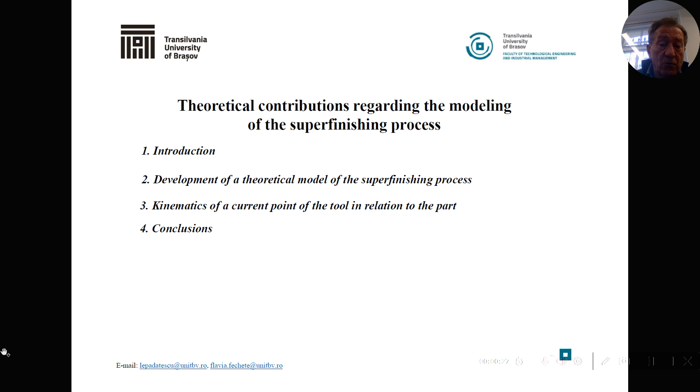As an introduction, the study of kinematics of a point of the abrasive tool on the surface of the part arose from the need to know the shape and length of the trajectory of a grain during rotation of the part. This is necessary to determine the parameters of the chipping regime, the length of the curve generated by the particle of the abrasive tool on the surface of the part, to observe which elements intervene in the equation of the trajectory of the movement of an abrasive grain, and to intervene on them to optimize the chipping regime.

Also, based on the relations obtained to determine the space traveled by the abrasive grain, the respective velocity and acceleration can be determined by differentiating with respect to time, and it can be observed during the entire processing that these parameters have variable values over a period. This fact leads to a variation of the parameters of the cutting regime and explains the fact that the roughness obtained after processing is not constant over the entire surface of the piece.

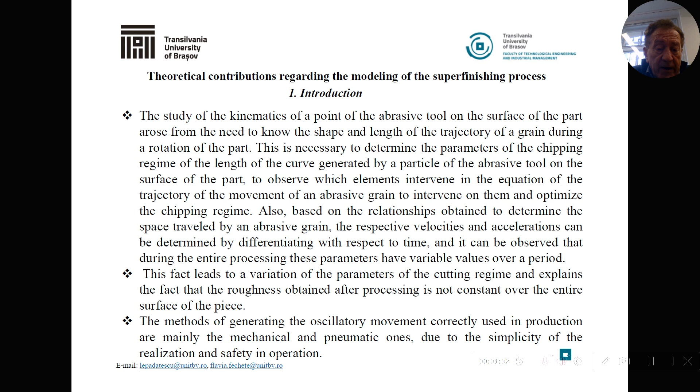The methods of generating the oscillatory movement currently used in production are mainly mechanical and pneumatic, due to the simplicity of realization and operation.

Development of the theoretical model of the superfinishing process. The theoretical model explains the phenomenon of automatic interruption of the chipping process during superfinishing through the prism of the intervention of the chipping liquid characterized by viscosity.

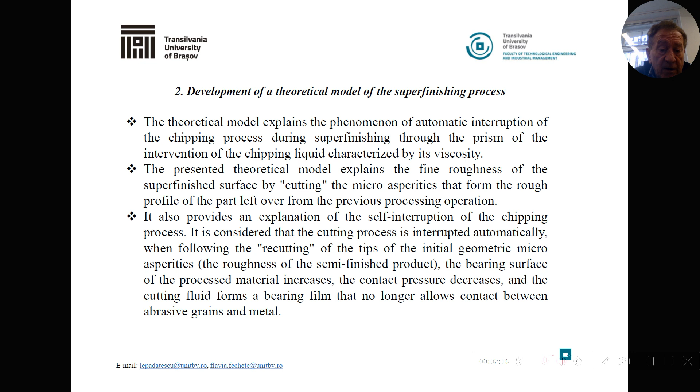The presented theoretical model explains the fine roughness of the superfinished surface by cutting the micro asperities that form the rough profile of the part left over by the previous processing operation. It also provides an explanation of the self-interruption of the chipping process. It is considered that the cutting process is interrupted automatically following the removal of the tips of the initial geometric micro asperities.

The proposed theoretical model starts from the following specifications. The active part of the abrasive grain, not embedded in the binder, has a dimension comparable to the maximum height of the micro asperities, about 4 microns, that form the profile of the processed part. The chipping liquid present in the processing area can be assimilated with a continuous environment of spherical particles that try to form an adsorption layer on the surface of solid bodies, but due to dimensions close to those of the micro-relief of the part, they fail to penetrate into the micro-asperity profile.

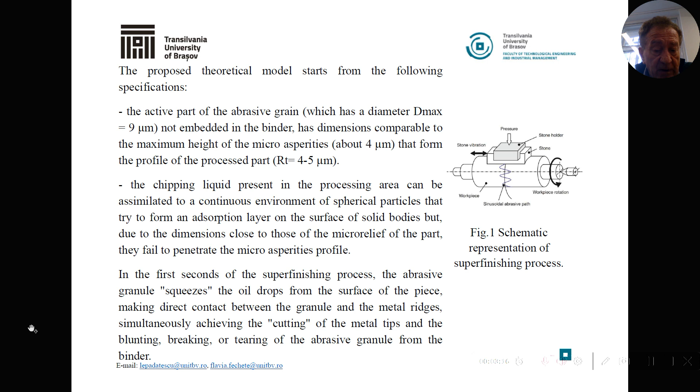In the first second of the superfinishing process, the abrasive granule squeezes the oil drops from the surface of the piece, making contact between the granule and the metal ridges, simultaneously achieving the cutting of the metal tips and the blunting, breaking, or tearing of the abrasive granule from the binder.

Part of the metal tips can be fragmented and pulled from the machining area by the cutting liquid, and others remain and penetrate into the depth of the valley. The alternating movement of the tool favors the stuffing of the chips pulled into the micro-relief of the part. In the next 10 seconds of machining, the abrasive removes the entire layer of material that constitutes the initial micro-relief and begins to dig into the compact material.

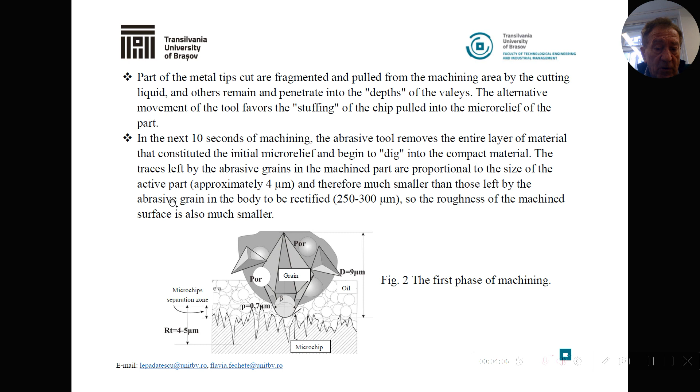The traces left by the abrasive grains in the machined part are proportional to the size of the active part, and therefore much smaller than those left by the abrasive grain in the body of the grinding wheel. So the roughness of the machined surface is much smaller. You can see this in the first phase of the machining. The peaks of the superfinished surface are much more frequent and finer, so the bearing surface is larger and the pressure lower. The oil particles no longer pierced, and the superfinishing process is much more difficult.

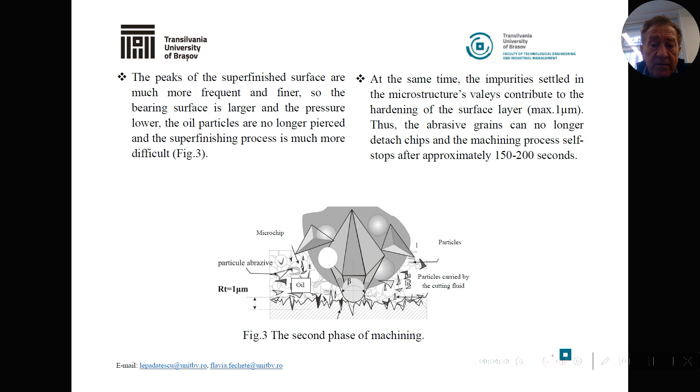At the same time, the impurities settled in the microstructure valleys contribute to the hardening of the surface layer. Thus, the abrasive grain can no longer detach chips, and the machining process stops after approximately 200 seconds.

Kinematics of the current point of the tool in relation to the part. The first is superfinishing with plunge feed. During the processing of the part by superfinishing, the abrasive grain describes trajectories of different shape and length on the surface of the part. The length of this trajectory is considered to represent the degree of coverage of the surface with traces of the processing.

There is a direct link between the degree of coverage and the quality of the surface of the piece, in the sense that with the increase of the degree of coverage, the roughness of the surface, the bearing coefficient, and the state of the surface layer improve. An abrasive particle has a periodic sinusoidal movement during processing, whose equation you can see here, where omega is the angular velocity of the part.

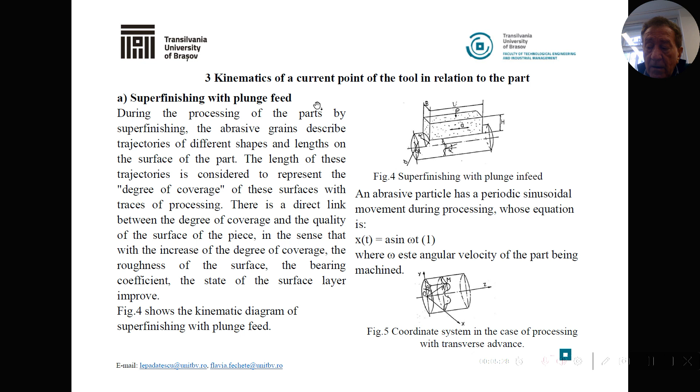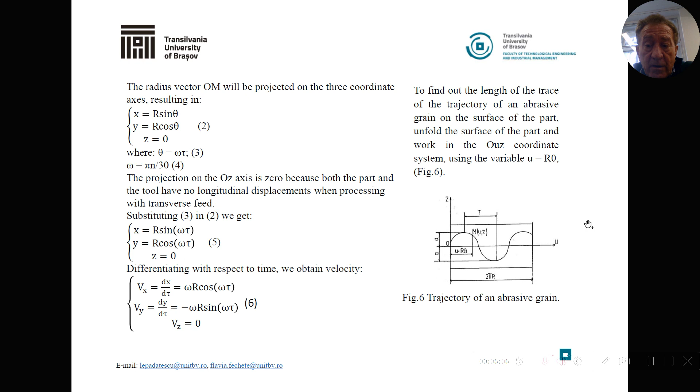To find out the length of the trace of the trajectory of the abrasive grain on the surface of the part, unfold the surface of the part and work in the Ouz coordinate system, using the variable u = Rθ. Processing the relation and considering that only the length of the trajectory of the abrasive grain at one rotation of the part will be taken into account, the limits of the parameter will be 0 and 2π, resulting in formula 14.

From relation 14, it can be seen which factors lead to an increase in the length of the trajectory of the abrasive grain on the surface of the part, because the quality obtained after processing is directly proportional to its length. The amplitude of the oscillatory movement also has an important influence, because as the amplitude increases, so does the quality of the processed surface. The amplitude cannot be too high because it is limited by technological and functional considerations.

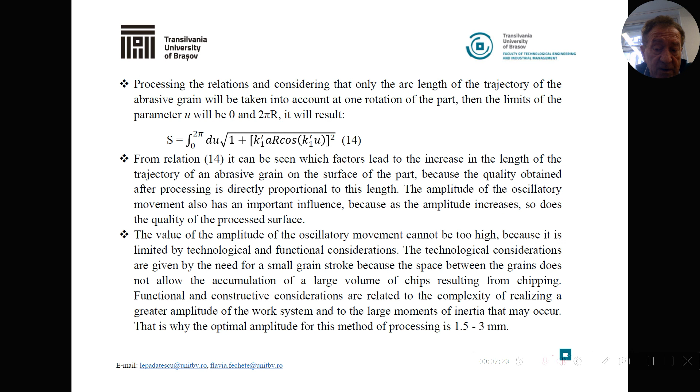The technological considerations are given by the need for a small grain stroke, because the space between the grains does not allow for accumulation of the large volume of chips resulting from chipping. Functional and constructive considerations are related to the complexity of realizing a greater amplitude of the work system and the large moment of inertia that may occur. That is why the optimal amplitude is 1.5 to 3 mm.

Second is superfinishing with through feed. If the length of the processed part is greater than the length of the abrasive bar, then in addition to harmonic oscillatory and plunge feed, the tool or the part must perform a longitudinal feed. For example, let's assume that the workpiece has a rotation movement and through feed with axial speed V0. The abrasive bar has a harmonic oscillatory movement with an oscillating stroke and is pressed on the surface of the workpiece with a force P.

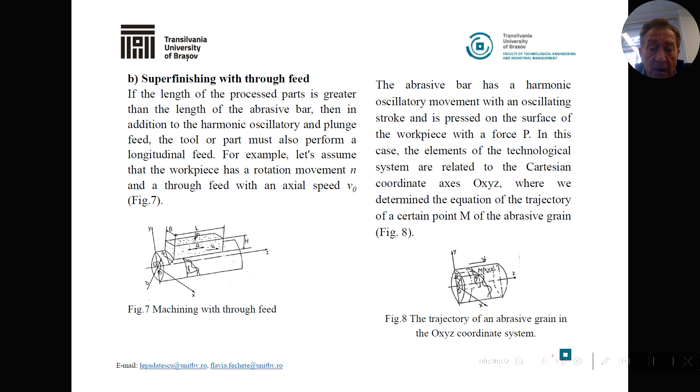In this case, the elements of the technological system are related to the Cartesian coordinates OXYZ, and we determine the equation of the trajectory of a certain point M of the abrasive grain. Thus, from the figure, the radius vector of a certain point M of the abrasive tool is broken down into components in 3 coordinates. The system relation 15 becomes 16. Differentiating with respect to time, we obtain the velocity.

The arc of the curve described between the abscissas u1 and u2 has a length given by 23. Calculating the length of the trajectory curve of the abrasive grain at a single rotation of the part, with integration limits 0 and 2π, we have relation 24.

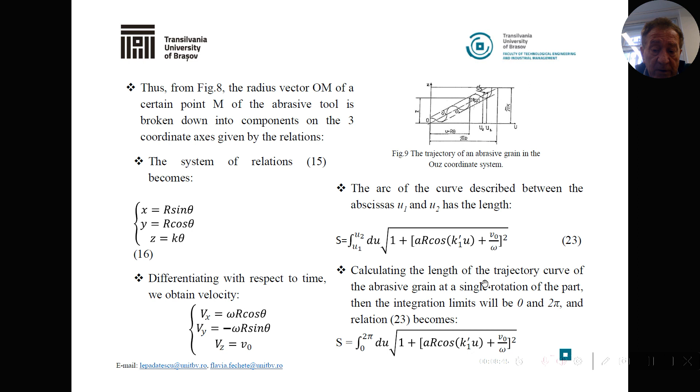From relation 24, it can be seen that the length of the curve traced by an abrasive grain on the surface of the part will be greater if the amplitude of the oscillatory movement and axial speed V0 impressed on the tool or the part are increased. The amplitude of the oscillation cannot be affected too much, because a value higher than 3 mm would lead to a worsening of the evacuation of the chips and therefore the machining capacity of the abrasive grains.

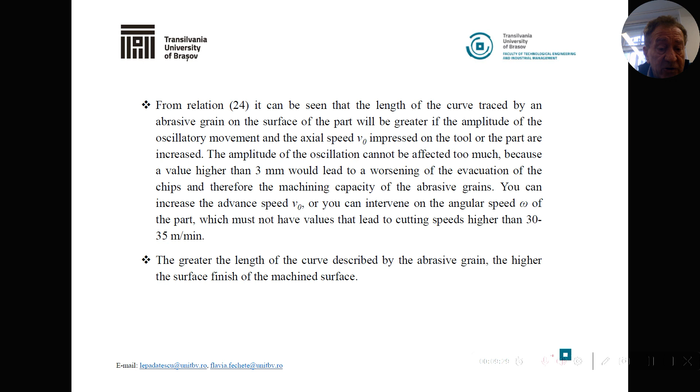You can increase the advance speed V0, or you can intervene on the angular speed omega of the part, which must not have values that lead to cutting speeds higher than 35 meters per minute. The greater the length of the curve described by the abrasive grain, the higher the surface finish. The third and last one is the superfinishing with 2 oscillatory movements.

To increase the intensity of the machining process and the productivity of the process, it is recommended that the abrasive tool perform 2 types of oscillatory movement with different amplitudes and frequencies. For example, an oscillatory movement produced pneumatically with smaller amplitude, 3 mm, and high frequency, up to 2000 cycles per minute, and another mechanically generated oscillatory movement with a higher amplitude up to 20 mm, with a lower frequency up to 150 cycles per minute.

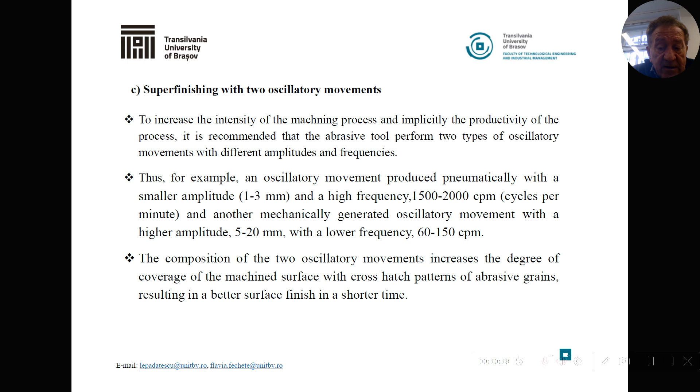The composition of the two oscillatory movements increases the degree of coverage of the machining surface with a cross-hatch pattern of abrasive grains, resulting in a better surface finish in a shorter time. So, we will study the case where the oscillatory motion of the abrasive tool is composed of an oscillatory movement produced by a mechanical generator and another oscillatory movement produced pneumatically.

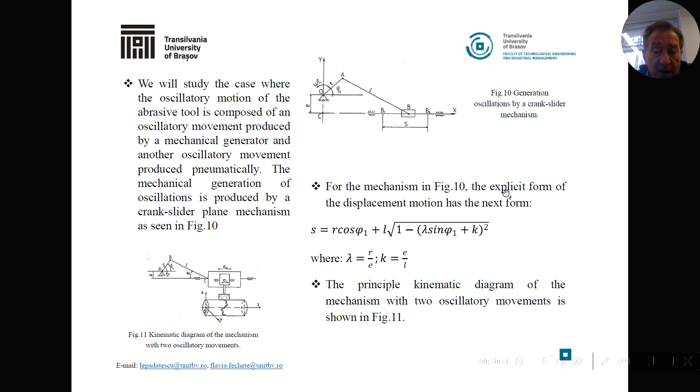The mechanical generation of the oscillation is produced by the crank-slider plane mechanism used in figure 10. For the mechanism in figure 10, the explicit form of the displacement is the next formula. The principal kinematic diagram of the mechanism with two oscillatory movements is shown in figure 11. From figure 11, it can be seen that the path left by the abrasive grain on the surface of the part is actually a composition of two harmonic oscillatory movements.

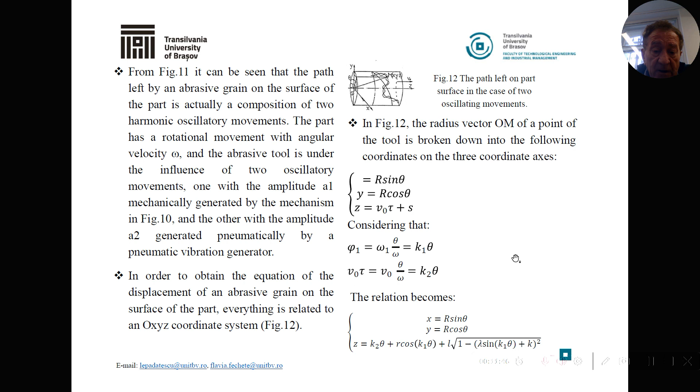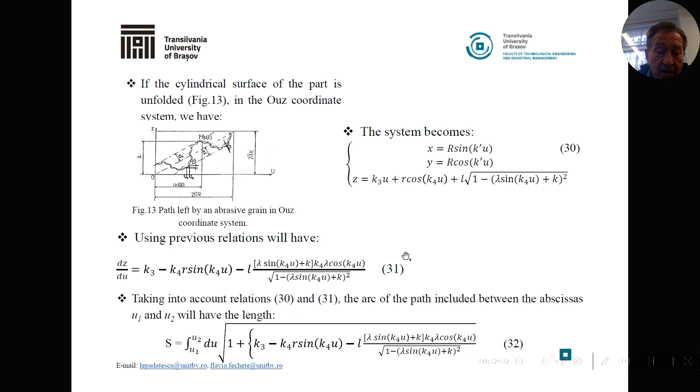In figure 12, the radius vector OM of a point of the tool is broken down into the following coordinates. You can see in the system, and considering this value, the relation becomes... If the cylindrical surface of the part is unfolded in the coordinate system Ouz, we have this figure 13. Using the previous relation, we have relation 31, and taking into account relations 30 and 31, the arc of path included between the abscissas U1 and U2 will have the length of 32.

From the previous relation, we can draw the conclusion regarding the factors that influence the length S of the trajectory of an abrasive grain on the surface of the part. Thus, it can be seen that to increase the length S of the trajectory of the abrasive grain, the angular speed omega 1, the radius R, and the length L of the mechanical oscillation generation mechanism must be increased. Also, to increase the length S, the amplitudes A1 and A2 of the two oscillatory movements can be increased.

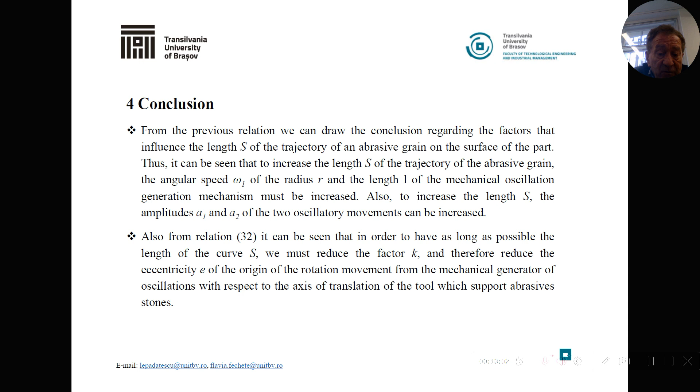Also, from relation 32, it can be seen that in order to have as long as possible the length of the curve S, we must reduce the factor K and therefore reduce the eccentricity E of the origin of the rotation movement of the mechanical oscillation generator with respect to the axis of translation of the tool which supports the abrasive stones.